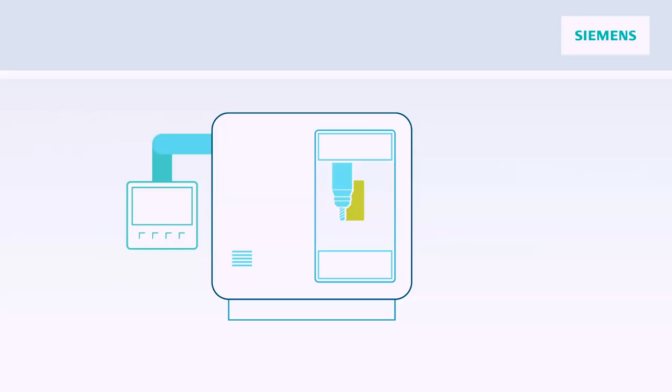So the market has basically moved to using NC machines to manufacture those cases. This is due to the tight link you have between the CAD, CAM, and the NC machines. Basically, you can introduce a design change by the click of one button, so you have an instantaneous update of the design.

This was a huge step forward, going from waiting for months to instantaneous. Manufacturers took thousands or tens of thousands of these machines, installed them in their factories so they could ramp up production. Who would have thought 5 years ago that this was a valid business model, but now it's the norm. It's a great example of digitalization disrupting the industry.

Okay, so we have it, CAD CAM, and you're good to go to the digital world. No, hold your horses, Magnus. That may be true for cell phone cases, but innovation's driving down the cycle times and the lot sizes of every industry. Right, so cell phone manufacturers have taken a huge leap in regards to speed, flexibility, quality, and efficiency.

And this is something all industries should start doing. I mean, be it trains or airplanes or high-tech electronic equipment or whatever. It applies to all industries, even personalized medicines. And these are all very complex products you're talking about.

So there is no ultra-simple solution. You can't automate your way out of these challenges. If you focus only on the automation aspect of manufacturing, then that's just not enough anymore. That's correct. So what needs to be done then?

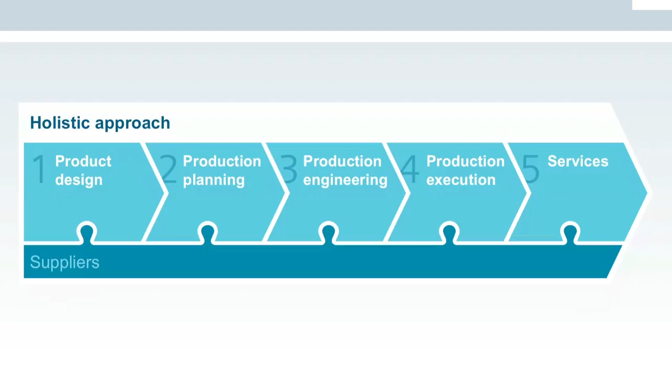Yeah, and that's really not a joke. For those of you who have not seen this, it wasn't even a very good joke, but this is really an amazing point.

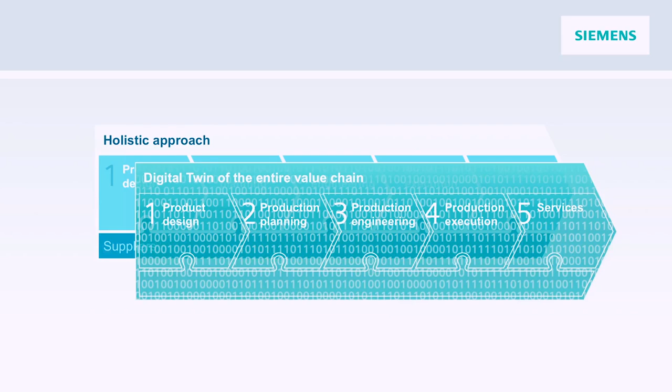It's one of the key messages in our story. We are able to take the digitalized and integrated value chain, and we are able to make a copy of it, a digital twin, a virtual world that runs in parallel to the real world, a world with products, even those complex ones, the equipment, the processes, and we can use simulation to determine how these interact, to understand if there'll be blockages, if there will be problems in the future, and we can resolve those in the virtual world before our customer ever has to commit resources in the real world.

So when I listen to you describing this, Alistair, to me it sounds like—I'm not a gambler, but I could tell which horse would win the race before the race even started.

Exactly, it's kind of cheating. I like to use another analogy: it's like you can throw yourself out of an aeroplane knowing for certain that your parachute will open because you've already seen it in the virtual world.

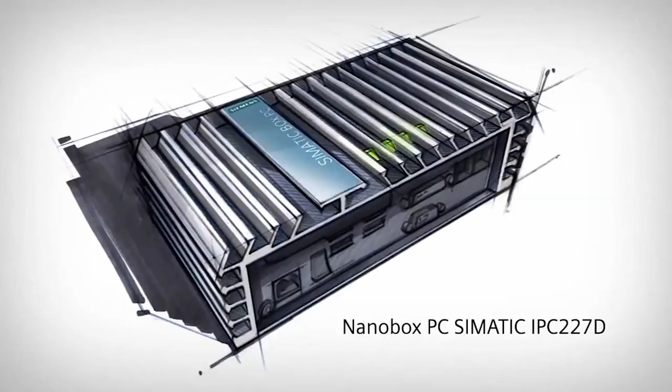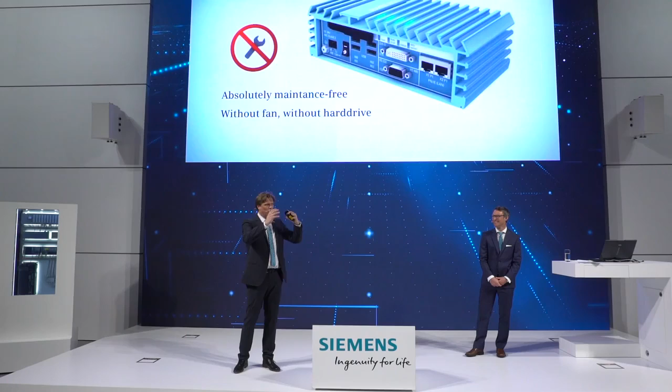So now we've been talking about this value chain for a while, and I will take you through a few of these steps using one of our own Siemens products, the IPC NanoBox. An industrial PC, about 1 liter in size, very compact, very sturdy. It's put to work in a very aggressive and violent environment - vibrations, hot and cold temperatures, electromagnetic fields, etc.

Those are the requirements that this little IPC is facing. So when you start to design, you collect the requirements and see what customers are expecting of this product. Once you start to design, the design engineer knows exactly how he needs to do the design of the IPC NanoBox. We also try to reuse as many components as possible to speed up the design process.

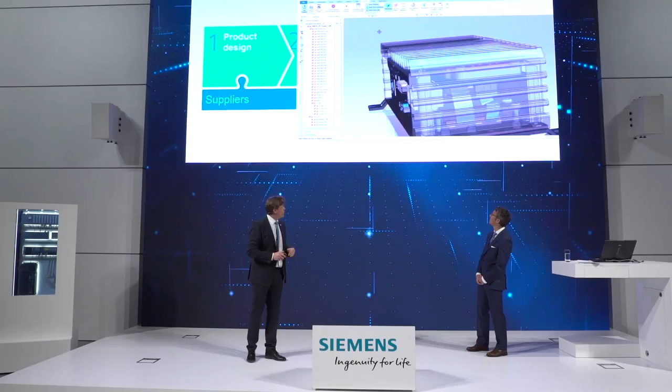This is really cool, Magnus. It's very, very lifelike, but it's still inside a computer. So I imagine the next step of our process is to build a physical prototype and test it to see if it works, right?

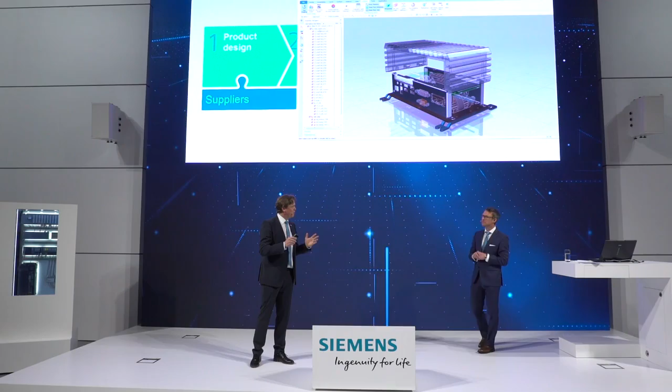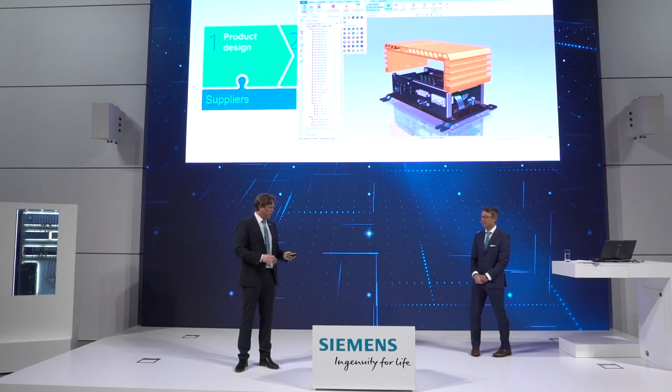No, we're talking digitalization, Alistair. It's a difficult word for me to pronounce, but it's fairly easy to understand. We have the NX CAD, CAE and CAM solution, integrated in one software. So the design engineer is modeling the NanoBox, and then the simulation engineer takes this information, knowing the requirements.

He builds a simulation to test those things - vibrations, heat development, etc. Should he discover a problem at this phase, he can easily communicate that information back to the stakeholder or owner of the design, all in a virtual environment. That's digitalization for you.

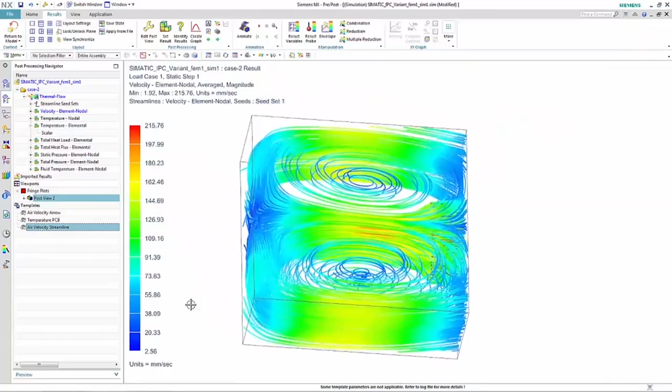We build the intelligence directly into the model itself, so all of the engineering colleagues can collaborate around this model. They can simultaneously engineer the product and its performance without having to rely on a final step of system engineering, which slows everything down. And we do all of this in the virtual world without building a physical prototype.

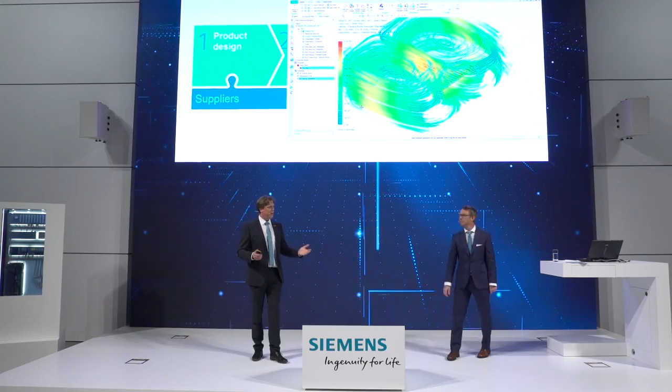Alistair, I'm proud of you - you just explained systems-driven product development. Basically, as you said, you take the requirements, do the design, and build a digital twin of your product that you can use in the next step, the production planning. You want to make sure you can build this NanoBox.

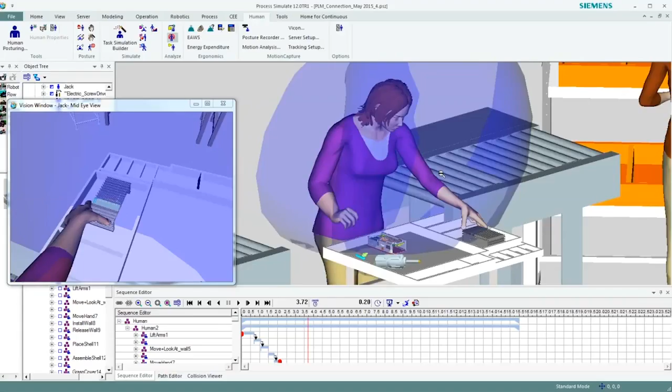In this movie, we're using Jill, a digital mannequin. You can use her arms to see what she can reach, use her eyes to see what she can see. I can even check what forces and torques are affecting her spine, especially in the fourth and fifth vertebra, where most work-related injuries actually occur.

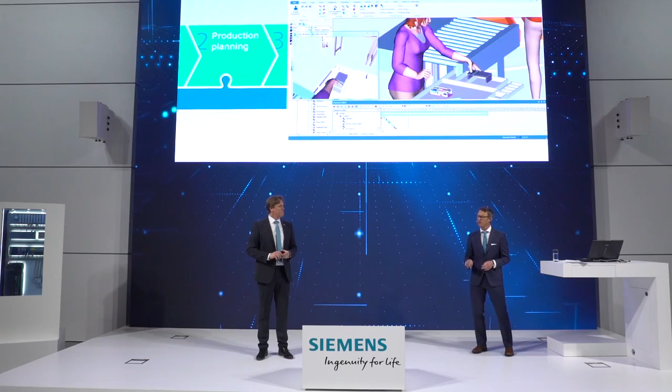That's awesome, I love the idea of digital people in our virtual world. But our customers are also asking us a lot about robotics - not those big robots in cages. They want things that sit on the shop floor with a couple of arms that can help people in the assembly process. Can we deal with those?

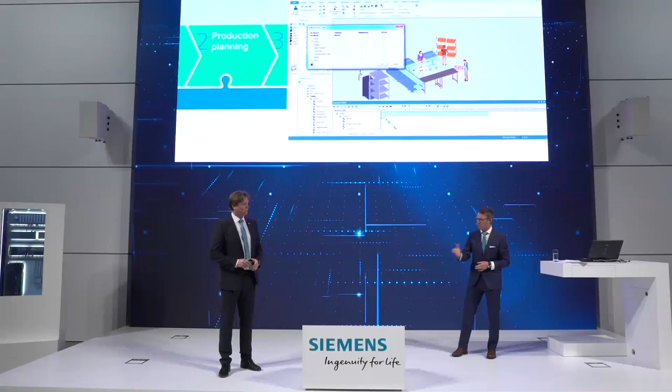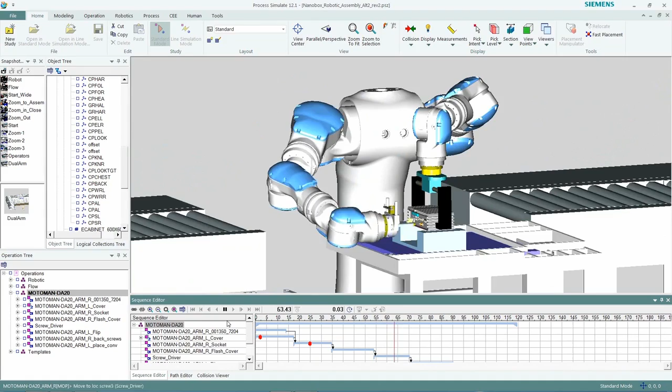We can. Basically take Jill out of the picture and put in a robot instead. So what we have here is a dual-arm robot. We program it in our virtual world, making sure we don't have any collisions, which may occur if you're in a narrow environment. Bang - you want to discover that type of collision in the digital world because it doesn't hurt anyone, you don't break any resources. Those are the benefits of working in this environment.

Let me take you to one more step along the production line. We have requirements regarding the product, but we also have requirements regarding the output volume - how many do we need to produce of the IPC NanoBox? That we can check with plant simulation, basically discrete event simulation - how many components are floating through the factory, do we have bottlenecks, and we can even check the energy consumption of this facility digitally.

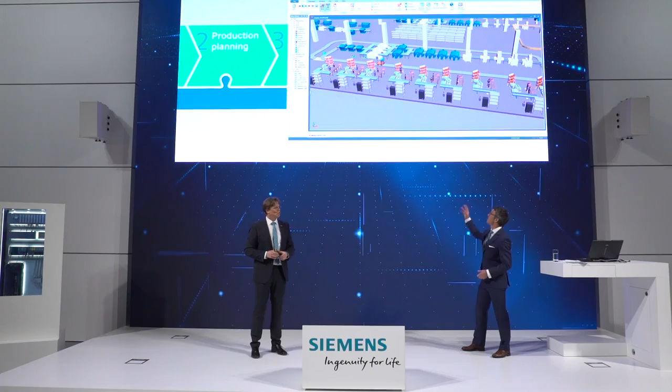It's amazing, this is really where it all comes together. I've got everything there - the people, the robots, the logistics. It's awesome, but it seems to be running at real-time speed - what's the point of that? Well, the point is, dear Alistair, that I can tweak this so it runs at 1,000 times real time.

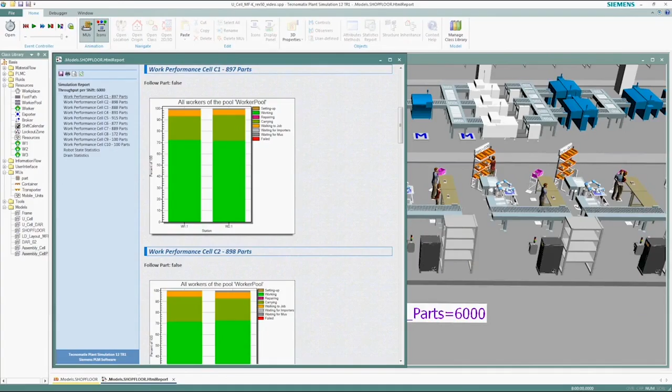Within minutes, I can simulate a month's worth of work, or perhaps even a year. You can look into the future a year. That's your crystal ball right there.

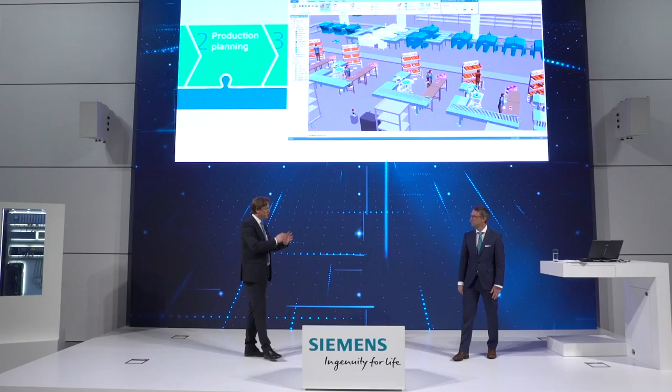So now we've been through step number one, the design phase. We take in the digital twin and use it also in the production planning, and in this way we have checked every aspect of the production process.

Okay, so I was right, this virtual world is awesome. The question is, can it really work in the real world? And the answer is not until my automation code is written.

It's normally at this point when our customers send an army of engineers out onto the shop floor and they start coding the PLCs. Essentially, the digital thread is broken.

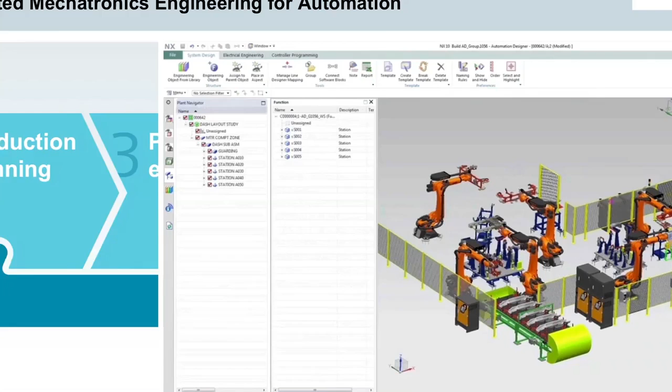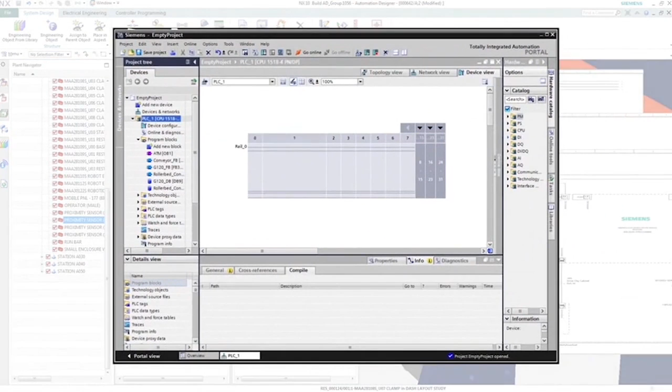Well, we want to create an end-to-end digital enterprise. And so we're extremely proud that this year, just behind you in the booth, we can show you the first truly integrated mechatronic engineering suite. We're taking the mechanical aspect of your robots and your equipment, and for the first time we're extending it to cover also the entire electrical and automation aspects of the machines.

Check this out, Magnus. We're actually taking all those movements and we're using it to derive all of the automation code. No more writing automation code. We're automating the engineering and we're downloading it into the TIA Portal so it's ready for production.

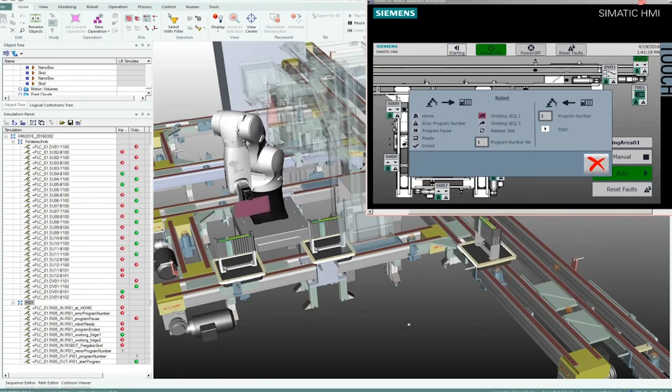Amazing. So instead of asking our customers to take their PLC code down to the shop floor and test it on a real system, we actually take the controllers and hook that up to our digital twin, a virtual world, making sure that the program is bug-free and everything. And that's what we call virtual commissioning.

That's another thing you can see behind you in the booth. We have a real robot, we have a virtual robot, and we can switch our automation to control the real one or the virtual one.

It's very compelling. Now we've completed our digital twin. We've designed and defined the product, the process, and now every aspect of the equipment. I really talk about these as separate parts of a digital twin, but they're fundamentally integrated. And it's this integration which allows our virtual world to act and react as though it's real. That's where the real value comes from.

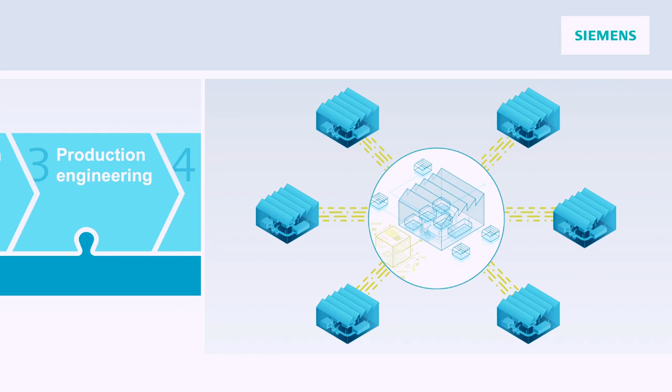So now we take this optimized digital twin. We communicate this to all the stakeholders involved in this process using our amazing collaboration platform, Teamcenter. So without delay, without uncertainty, this very moment is where the rubber hits the road. The rubber does hit the road.

And this is another point in a traditional company where the digital thread can break. Engineering and operations are usually disconnected, but not in a digital enterprise.

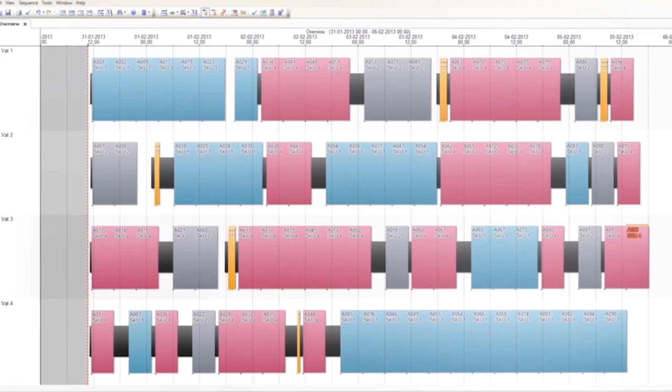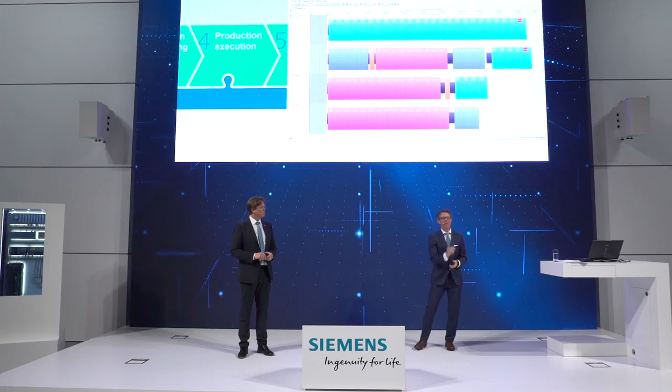And we're going to take that, we're going to reschedule it using the detailed information in our digital twin. It's now fully optimized, all our resources are allocated correctly. And we're going to take every one of those orders, and an order now can be a lot size of one, and we're going to associate it with our digital twin, with our bill of process.

That's the kind of manufacturing blueprint you can see up there, sitting at the enterprise level. And we can push that into our plant in Mexico, in China, in the US. There it is on the shop floor now, ready to execute.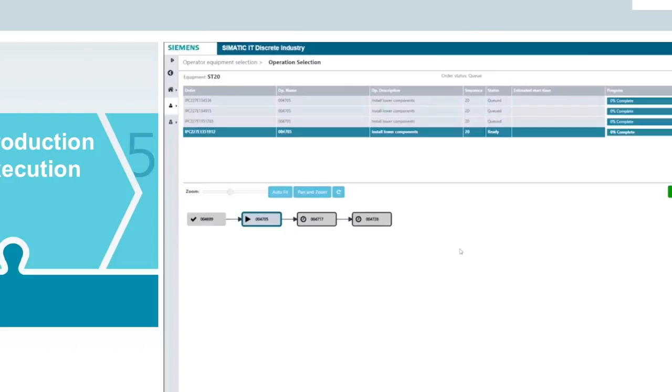That execution is done by the MES system, the manufacturing execution system. It'll use the bill of process to coordinate and synchronize all the resources, the people, the machines, the logistics, and it'll make this product right the first time.

And it has to, because if we only have lot size one, if it's an individualized product, if we don't get it right the first time, we go out of business.

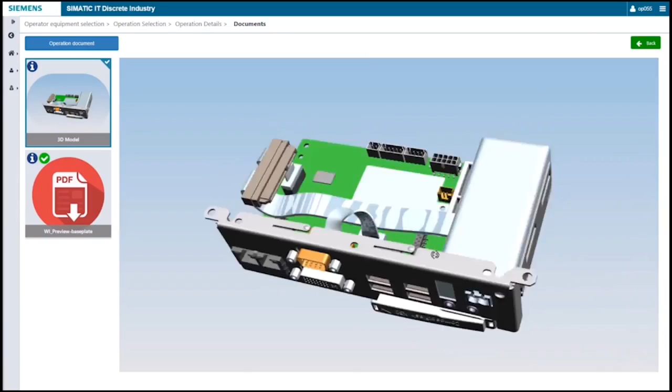But we also need to keep in mind that many of our assembly operations are still manual. And throughout the journey from design through manufacturing planning and so on, we have generated a lot of information, and we can use it as electronic work instructions.

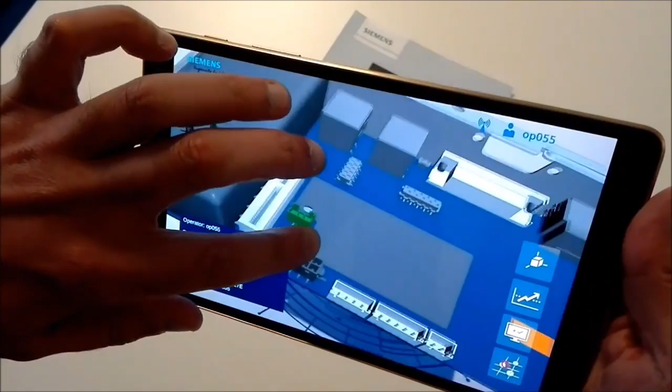So this information is now sent down to the shop floor, to the assembly line, to the correct operator at the very right moment in time, so that she or he can actually assemble our product in the best manner possible.

You can use it on a normal monitor, or as you can see here, a tablet PC with augmented reality. Really, really cool stuff. We want our plant and the people, the real ones, to behave like the simulation. So we blend the real and the virtual world. And again, this is another compelling demonstration that you can see in our booth afterwards.

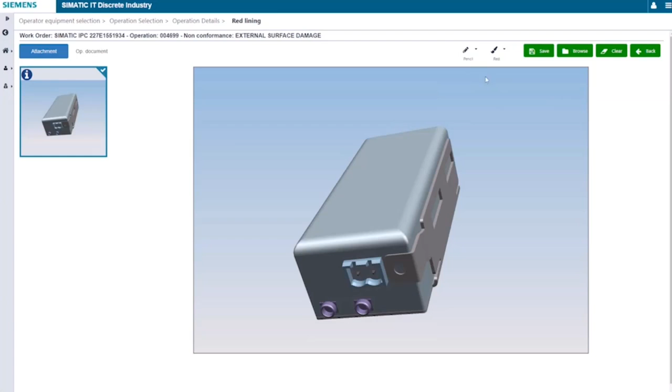As the production continues, the MES is creating an as-built document, which we can continuously compare to the as-engineered and as-planned definition, and we can find any deviations. Those deviations can be used to keep production on track.

Any defects we find would normally stop production, because the operations guys don't know how to deal with them. But in a digital enterprise, engineering and operations can work together. Operations can reach into the digital twin, red line that model with the problem, and hand it back to engineering.

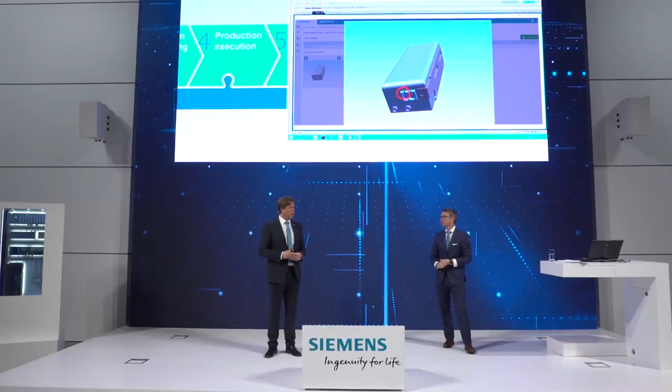And they can collaborate to find an effective and fast solution. So at this moment, our product is produced, made on time, on spec, and on price. You would think that's when the life cycle stops. No, it does not.

If we take a scenario where you're a machine builder, it's very likely your machine is put to work at your customer's side, producing products, but also generating a lot of important data that we can analyze and use to optimize the entire process and the machine, and schedule maintenance work, etc. So you have a very nice ownership experience.

Precisely, and if I am that manufacturer, I'm using the machine, I'm producing products—tens of thousands, hundreds of thousands of products—and selling them into the market, hopefully. But they're smart products, they're generating data too.

Just like we did for the machine, we can capture all of that data, aggregate it in our cloud, derive insights about real-world performance of that product, define firmware updates and push them into the running products in our customers' homes and factories. And we can take all of that learning and build it back into the next generation of the product seamlessly and easily.

Speed, flexibility, quality, and efficiency. What else do you need? Well, nothing really. We've taken our value chain and made it agile. Now our company can navigate in the market, toward opportunity, away from peril.

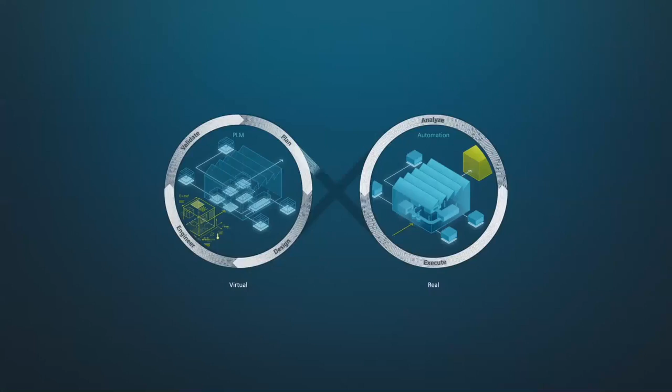So basically, take advantage of the virtual world to deliver answers to requests from your customers with ridiculous speed. And when the customer says yes to this individualized design, we can press another button and use the digital thread to produce it in the right factory. And it will be right first time, because we already tried it 10,000 times in the virtual world.

And all the data it produces, we're going to build back into the virtual world so that our company is growing and improving every time.

A year ago, we stood on this stage and described how we had built 15 years of digitalization experience into a unique product portfolio called the Digital Enterprise Software Suite. We're very happy after one year to tell you it's still completely unique. There's still no other company out there creating a holistic solution for digitalization.

But during the last year, we've taken another step forward away from our competitors, because we built into our suite full data and lifecycle analytical capabilities. And it doesn't stop there, because every year when you come back, you'll see more amazing things that we have invented, developed, and built into that product.

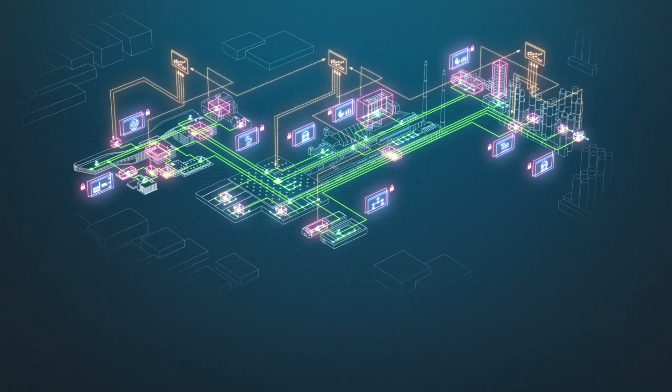So if you buy into our Digital Enterprise Software Suite, you're going to be able to take advantage of this year after year. With Siemens, digitalization doesn't have to be a dream. It's reality now, and we invite you to take that opportunity and start building your own digital enterprise.